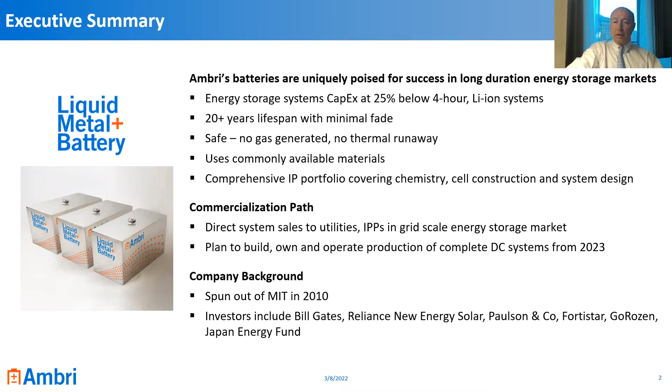And the materials are unique. It's a calcium antimony chemistry, so therefore we're not competing with EVs or other high volume applications for those materials. It's a US invented technology, mainly at MIT and at Ambri, which is based outside of Boston. And we do plan to manufacture these cells and containers in our initial US manufacturing facility.

Cells are packaged into trays. Trays are packaged into containers. The containers are about 1 megawatt hour each, 250 kilowatts of power capability. It's a high temperature chemistry, which means it does not require air conditioning systems. It's very suitable for hot temperature locations or very cold temperature locations.

Ambri is sharing this technology in order to get on the radar with DOE. We have developed this technology in the United States. We're planning to manufacture it here in the US. We're opening our first manufacturing facility later this year in Massachusetts.

And then in the end of 2022, we'll be securing a site for a high volume manufacturing facility somewhere else in the United States. We'd like to work with DOE on setting up those manufacturing facilities, understanding that there are non-lithium technologies coming that will be suitable for helping the proliferation of renewable energy onto the US grid.

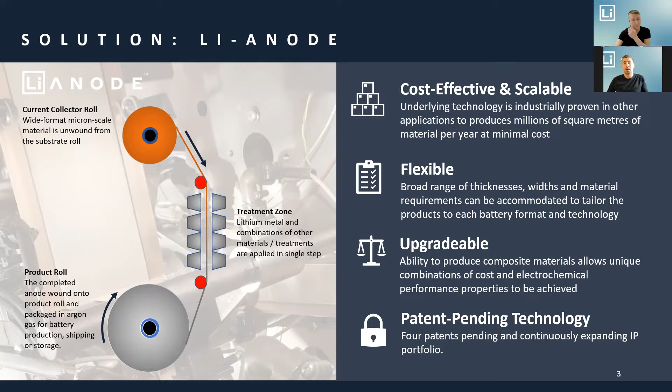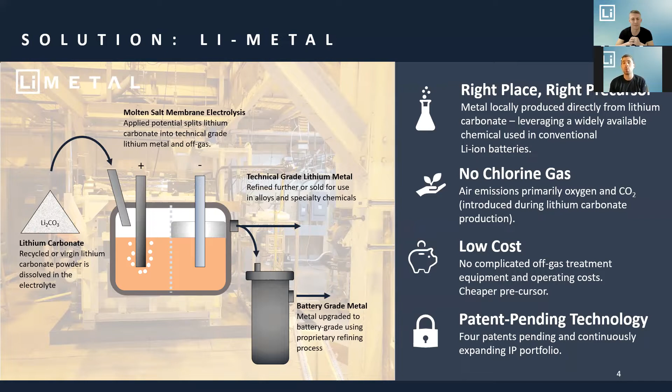Moving on to the lithium metal anode, we believe that there's a significant amount of workforce development in areas like roll-to-roll processing. For example, in Rochester, New York, where Kodak has largely shut down operations, there is a tremendous amount of films and roll-to-roll processing experience, and we hope to build on that with these two commercial demonstrations. We thank you for your time and look forward to the opportunity.

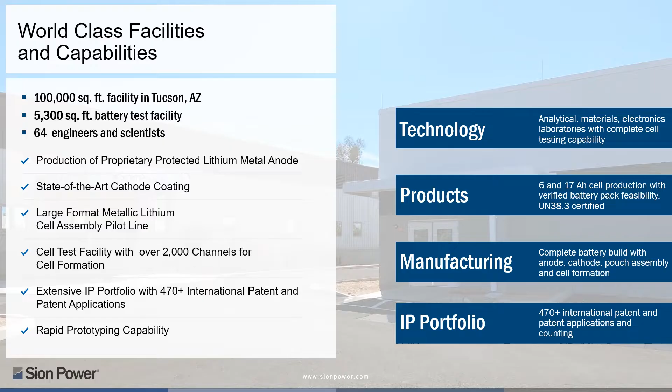Launching our next generation lithium battery technology, we are engaging in development activities with commercial partners and are finalizing our manufacturing expansion plans for the future. We've distilled our expansion initiatives into three phases.

Phase 1: in an effort to meet current demand, we will launch our new pilot facility that will be co-located on our campus, delivering large format commercial cells of 50 to 75 amp hours.

Phase 2: we will expand our manufacturing footprint, entering the Gigafactory class to meet forecasted demand. And as we anticipate continued growth in the EV space and continued market pull for advanced battery technologies, we expect to continue manufacturing expansion efforts to align and meet future demands as our Phase 3 activity.

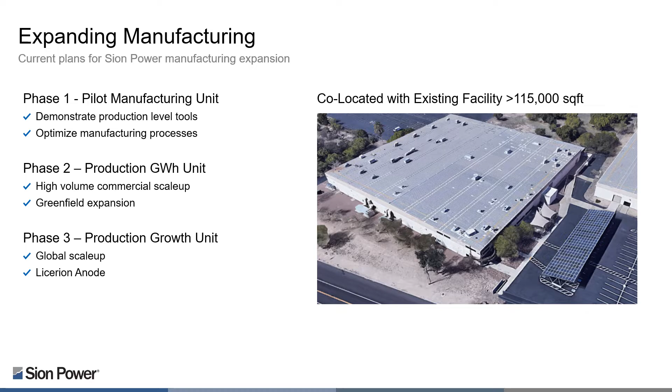Some of the challenges U.S. battery manufacturers face are common to other industries today, with the first challenge being critical supply chain constraints. This would include availability and sourcing of raw materials, as well as critical component and material availability with equipment vendors.

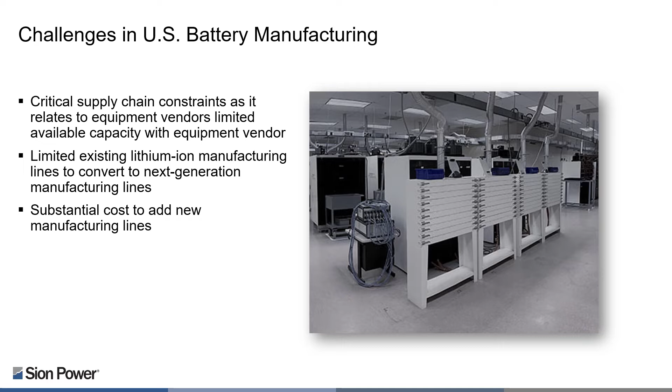Second, the availability of existing or idle lithium-ion manufacturing facilities that could be retrofit and upgraded with next-generation technology is limited. And third, the capital requirements needed to build and commission battery manufacturing facilities is substantial. Having access to capital and continuity of supply will be vital.

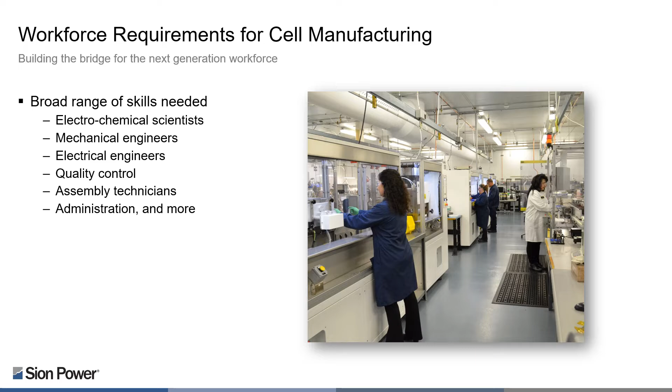Building the bridge for the next generation workforce is essential. As we've entered this new era of electrification and advanced manufacturing, we must focus on the training, development, and recruitment for a variety of disciplines and skill sets. It is imperative that we consider the entire ecosystem, securing public-private partnerships, working hand in hand with educational institutions to build training programs to develop the next workforce.

The electrification movement is no longer a question of if or when. The electrification movement is now. Thank you for your time and learning more about Sion Power.

II-VI Incorporated, a Pennsylvania-headquartered leader in engineered materials for more than 50 years, is bringing to market breakthrough technologies to enable the sustainable and cost-effective electrification of the U.S. economy. These include advanced battery materials, proprietary lithium-sulfur batteries, and high-efficiency hydrometallurgical recycling of battery waste.

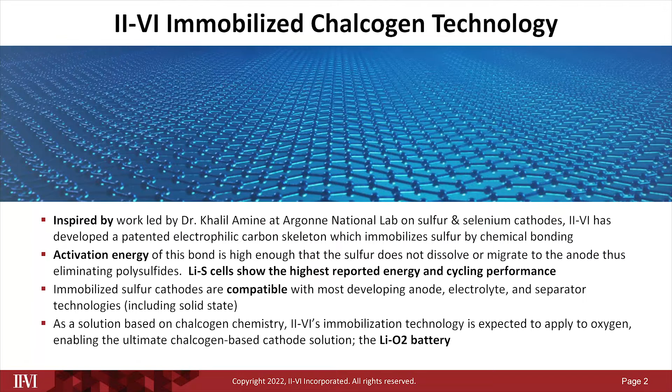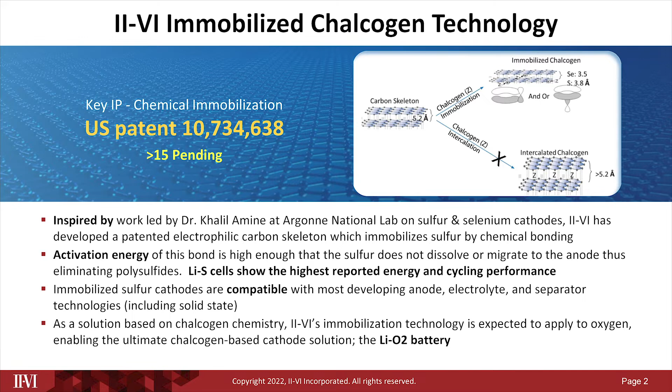Inspired by work led by Khalil Amine at Argonne National Lab, the engineered material behind II-VI's breakthrough lithium-sulfur batteries is a patented electrophilic carbon skeleton, which chemically binds to sulfur to prevent shuttling loss of the active material. Solving this shuttling issue enables the highest reported energy and cycling performance for lithium-sulfur battery cells.

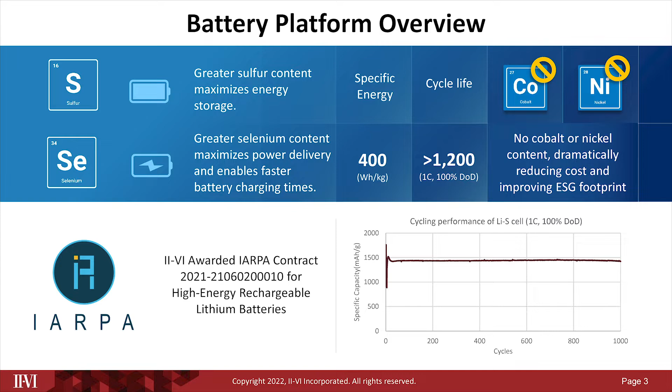Based on abundant sulfur, these cells contain no cobalt or nickel and can be further optimized for high power performance by adding highly conductive selenium to the carbon-sulfur cathode.

To ensure a competitive and stable supply chain for this breakthrough chemistry, II-VI has invested in pilot-scale manufacturing of lithium-sulfur battery materials, electrolytes, and electrodes, and will make these available to cell manufacturers at commercial scale.

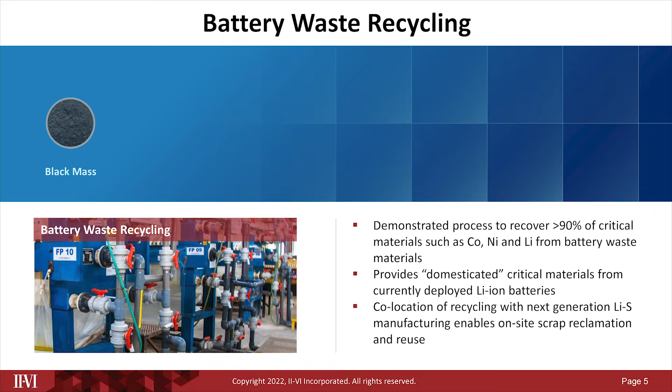Completing the whole life cycle approach, II-VI is also at the forefront of hydrometallurgical recycling of battery materials, with processes proven to extract more than 90% of the critical metals value in battery waste streams. This can be applied both to recovery of value from manufacturing scrap and end-of-life batteries.

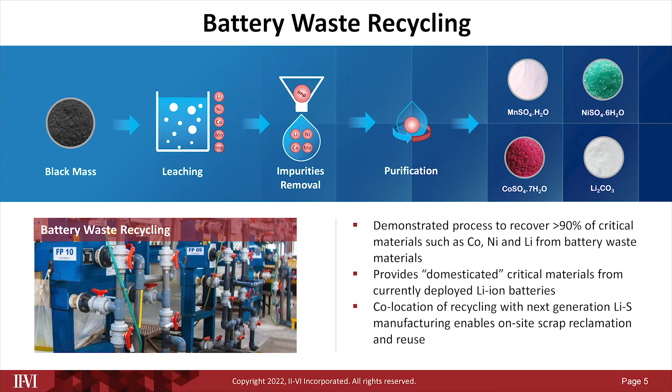With these initiatives, II-VI is positioned to accelerate electrification of the U.S. economy, enabling next-generation battery chemistries, efficient recycling, and a stable battery material supply chain.

Lithium-sulfur cells are expected to enter pilot production in 2024, with battery components and materials available beginning 2023, while pilot-scale recycling will begin in 2025.

Challenges to making these activities competitive globally are the need for skilled electrochemical and hydrometallurgical manufacturing personnel, simplified transportation logistics for batteries and battery materials, and support from local, state, and federal governments for the large capital investments required to operate at efficient scale.

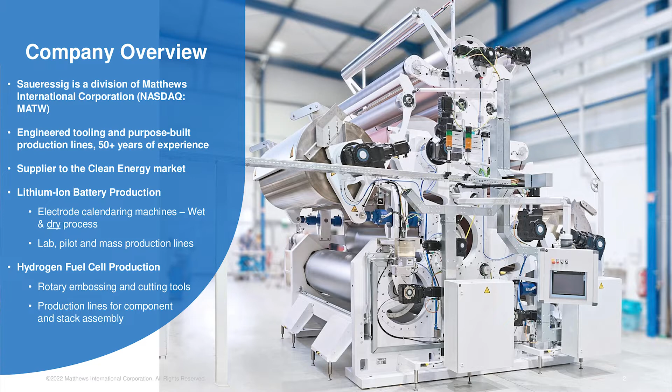For batteries, we design, engineer, and build electrode calendaring lines, both for traditional wet process and for dry process. This includes lab, pilot, and mass production lines. For hydrogen fuel cell production, we design and fabricate rotary embossing and cutting tools, and have the capability to engineer and build production lines for fuel cell component manufacturing and stack assembly.

We have designed and built machines specifically for the production of electrodes using a dry process with no organic solvents. These machines have demonstrated the ability to produce quality electrodes using a dry process. It works by using calendaring systems to produce a web from dry electrode powder, which is then laminated onto a metallic foil. Please note that Saueressig does not manufacture batteries or electrodes. What we do is engineer and build the production lines to enable battery manufacturing.

We're supporting the domestic production of batteries in a number of ways. Our electrode calendaring and laminating machines are designed in Germany, but we assemble, install, and commission them domestically. We're building a roller refurbishing operation to recoat and refinish the rollers that are worn after use on the production line, which helps extend the life of the rollers.

We're also investing in a new application development center in the US for battery manufacturers to experiment with formulations and processes on lab and pilot machines, both for the wet and dry process for electrode manufacturing.

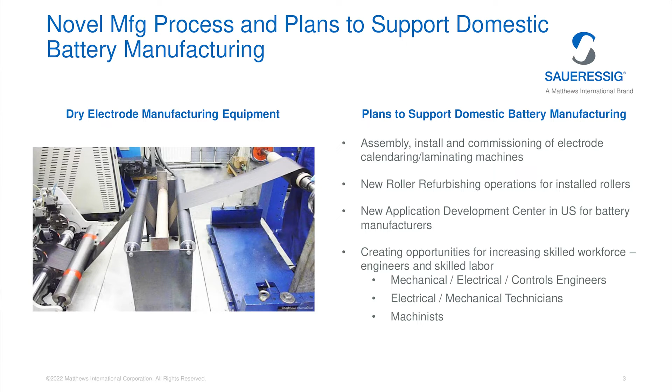To boost domestic capability, we have several workforce requirements, including engineers and skilled labor across multiple disciplines. This includes mechanical, electrical, and controls engineers, electrical and mechanical technicians, as well as skilled machinists.

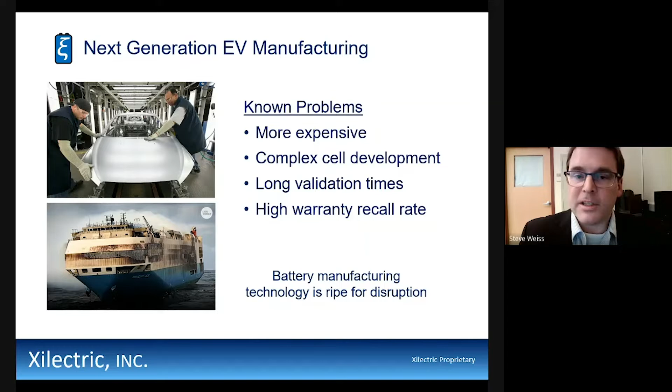Xilectric's core technology is a new electrochemical technique called cyclic coulometry. Cyclic coulometry was invented to measure the loss rate or self-discharge rate of a lithium-ion battery at an addressable condition, for example, at a particular temperature, voltage, or current. At the same time, without any added cost or complexity, the technique measures the associated growth in the complex impedance.

Xilectric is currently developing derivative QC metrics based on this and other key insights that can be measured in under 60 seconds. Based on these innovations, Xilectric is developing techniques for cell development, cell modeling, pack and cell validation, as well as manufacturing. Xilectric has been developing fast formation techniques based on our unique hardware for the last year and a half.

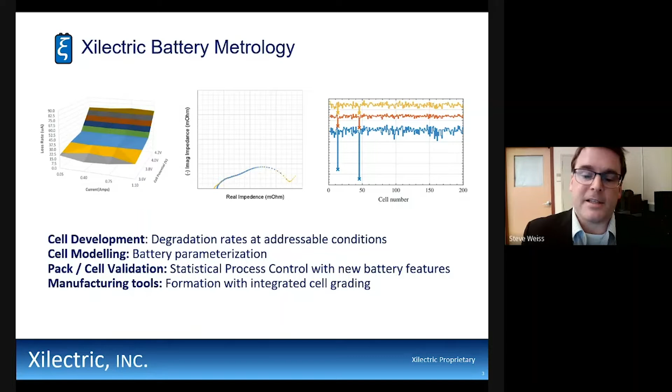The goal is to show that cell grading can occur at the same time during formation while providing superior insights to the QC metrics used today, such as multi-week OCV holds.

Xilectric is interested in leading a response to Topic Area 12, new manufacturing processes, or partnering for Topic Area 12 or 6 with appropriate partners who are interested in the new formation techniques. The objectives include faster throughput, improved battery insights, and integrated active feedback systems for smart manufacturing initiatives. The program would develop the hardware, process, and algorithms.

Xilectric seeks manufacturing partners for lithium-ion or beyond lithium-ion categories. In particular, emerging chemistries may not require the same formation processes, but would still require innovative and advanced cell grading.

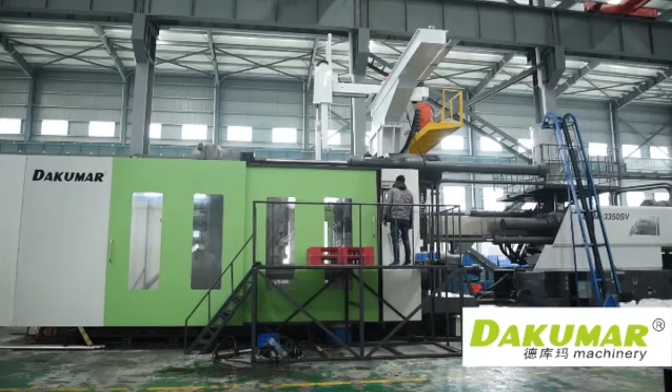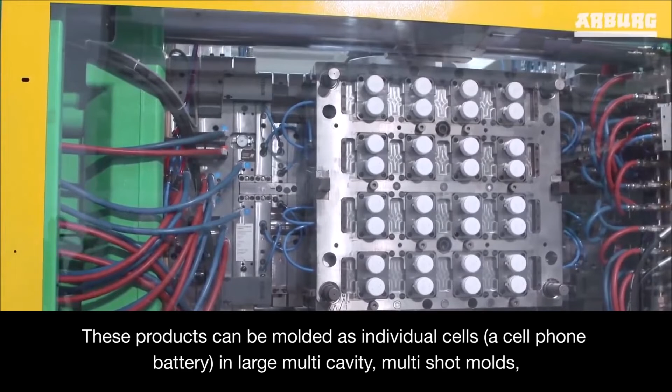This is an opportunity for which we have IP, issued and pending, trade secrets, and new injection moldable resin compounds. These products can be molded as individual cells, a cell phone battery, in large multi-cavity, multi-shot molds, or as battery or capacitor packs of say 1,000 cells all at once for EVs.

Additionally, the wiring bus can be molded in series or parallel as an integral part with the electrodes, thereby further reducing the labor content. The assembly labor costs are gone.

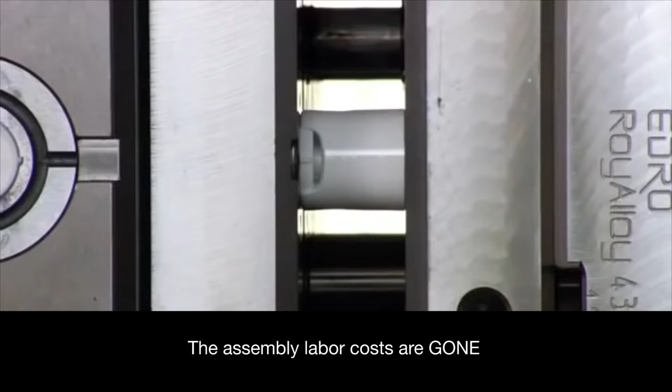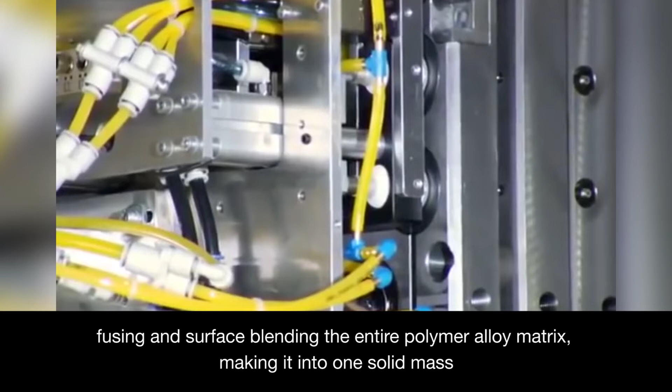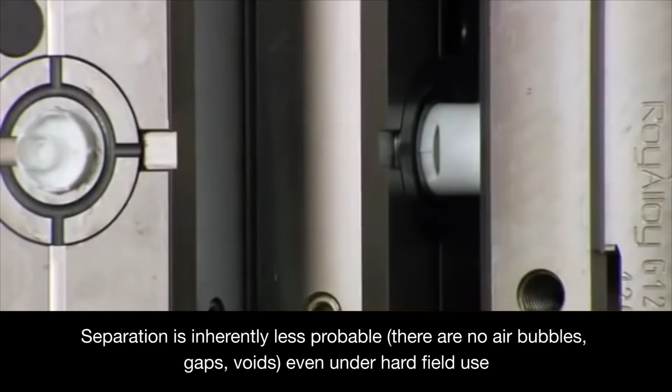Because they are polymer alloys, they are injected under several thousand psi pressure with heat, fusing and surface blending the entire polymer alloy matrix, making it into one solid mass. The anode, the cathode, the electrolyte, the case are all in one solid molded piece. Separation is inherently less probable. There are no air bubbles, gaps, voids, even under hard field use.

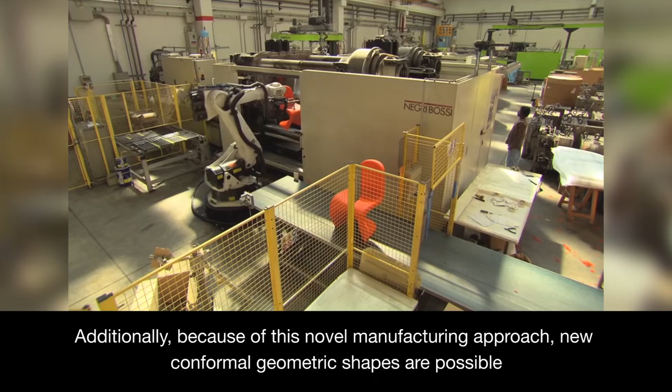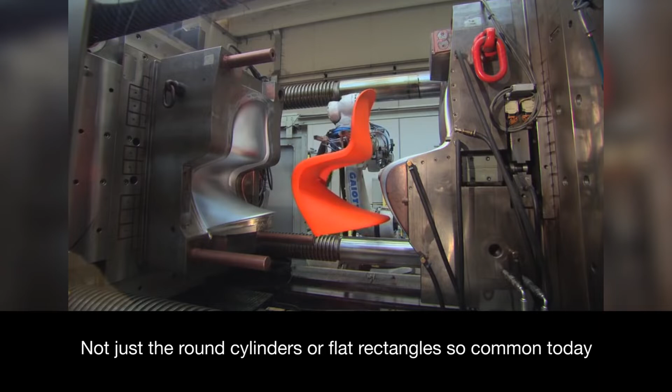Additionally, because of this novel manufacturing approach, new conformal geometric shapes are possible. Like all plastic parts, they can look like just about anything you can imagine, not just the round cylinders or flat rectangles so common today. It is adaptable to many different chemistries, anything that can take the heat beyond lithium.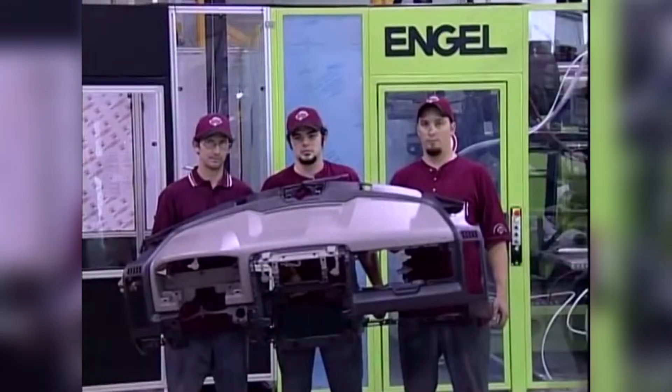This is a game changer in terms of cost reductions, taking capital and labor out. Physically more robust electrical storage units, probably higher capacities, new product designs, new applications, and geometric options.

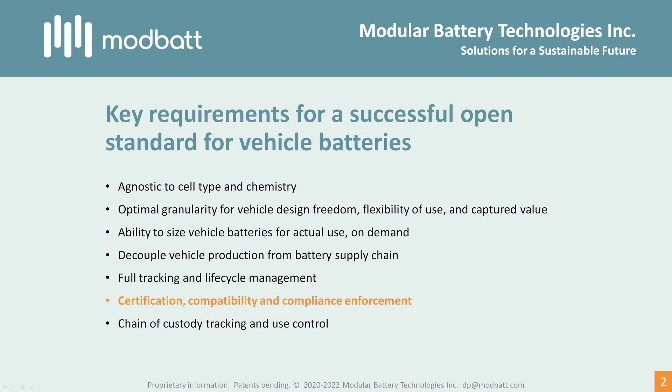Full tracking of the battery life cycle, as well as certification for compatibility and compliance to the standard, as is ensuring chain of custody tracking and use control.

Based on decades of experience, including designing and building high-performance vehicles from the ground up, ModBatt has developed a comprehensive suite of technologies. We are proposing them as the foundation for an open, royalty-free industry standard. We call this standard the Extendable Battery Framework, or EBF.

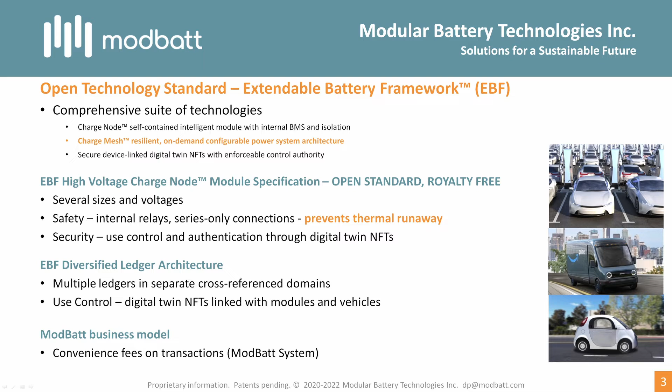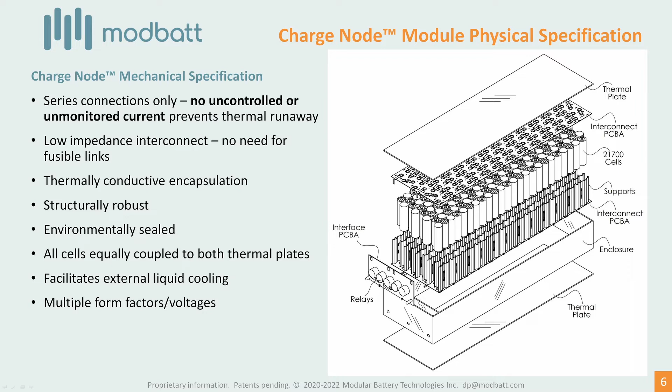It includes Charge Node, a self-contained intelligent module with internal BMS and isolation, Charge Mesh, a resilient, on-demand configurable power system architecture, as well as secure device-linked digital twin NFTs. Though based on proprietary IP, the Extendable Battery Framework is royalty-free to manufacturers of certified batteries and vehicles and administered by the Safe Battery Alliance, a 501c6 nonprofit.

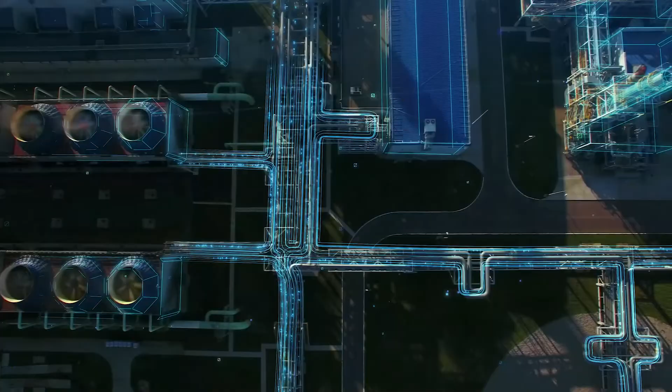To build the battery-powered economy of tomorrow, U.S. manufacturers today must navigate a complex supply chain, meet safety standards and regulations, and get to market quickly. UL is the global safety science company. We are a leader in testing, inspection, and certification for large batteries and energy storage systems.

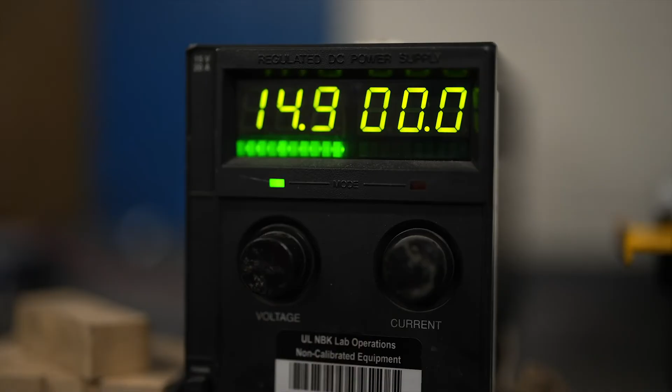We have extensive experience serving the entire battery industry value chain through our vast regulatory knowledge and regional laboratories. Since its founding in Chicago, UL has remained steadfast in pursuing safety on the cutting edge of American innovation.

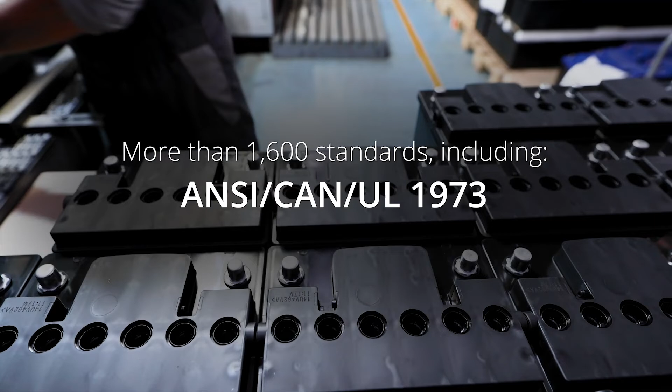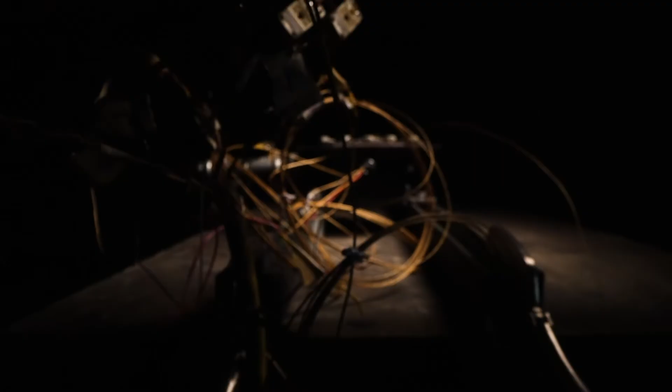Our expertise has helped develop more than 1,600 standards, including the world's first stationary battery, the first energy storage system, and before the market demanded it, the standard for repurposed batteries, anticipating what eventually became a vital piece of the modern supply chain. We also helped develop the recently published UL 9540A test method. We have more than 500 renewable energy experts with deep knowledge of requirements in more than 150 countries.

Of the Fortune 500 and Global 500, more than 60% are our customers. And the U.S. National Renewable Energy Laboratory chose us to be the permanent host for SolarApp.

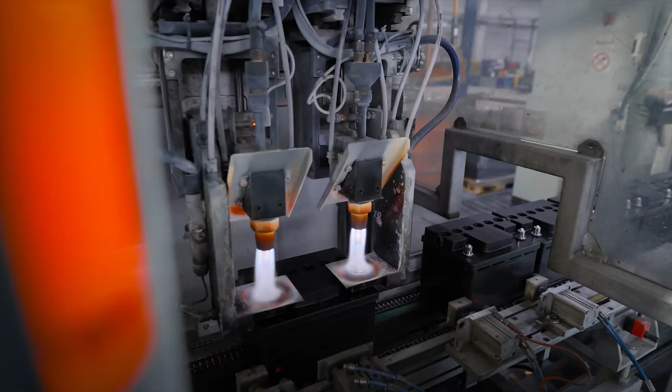Testing is critical to the entire battery supply chain, from manufacturers who rely on our insights into standards and our third-party impartial testing and certification, especially during component, process, cell, and pack manufacturing, to government agencies who rely on our expertise to help develop standards, to consumers who rely on the trust and confidence that comes from third-party testing, inspection, and certification.

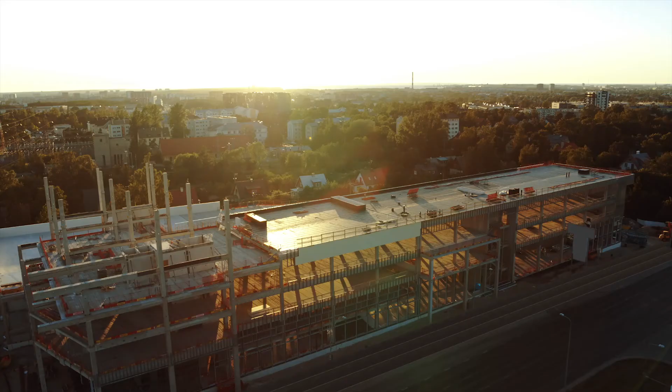UL is already planning to build the largest commercial battery laboratory in North America. Our funding will build a laboratory capable of battery testing for passenger and light to medium-duty trucks, industrial trucks like forklifts, and stationary batteries for applications such as energy storage, data centers, and telecommunications.

However, this laboratory is not designed for the much bigger batteries that power heavy-duty trucks, construction and agricultural equipment, ships such as tugs and ferries, and defense vehicles. With matching grant funds, we can scale up our operation to accommodate these very large battery applications, provide the critical testing that is missing in the marketplace, and add long-term performance testing.

U.S. battery independence is critical to maintaining the cutting edge of American innovation, construction, agriculture, shipping, and defense. With support from UL, these critical American industries and more can power the country with greater speed, greater safety, and greater efficiency through the 21st century.

Where the U.S. has always led is in innovation and entrepreneurship, in breakthrough, frankly, in high technology manufacturing. What we do is try to translate our knowledge to the customer, and that comes in the form of projects, education, and outreach—running short courses and educational series to make sure students are getting appropriate training in the energy storage industry.

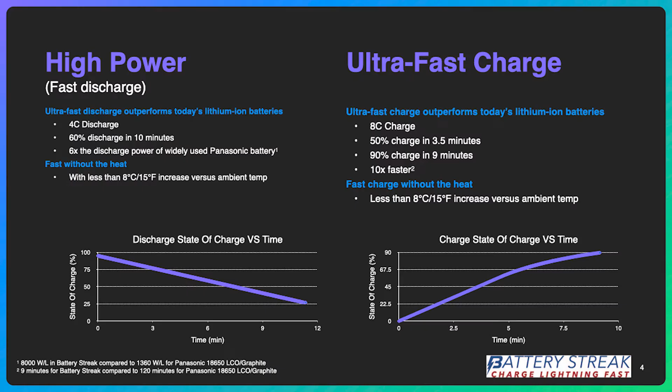Battery Streak is an advanced battery materials startup offering ultra-fast charging at room temperature and longer cycle life. With our technology, a cell phone and an electric vehicle could charge to 80% in 10 minutes.

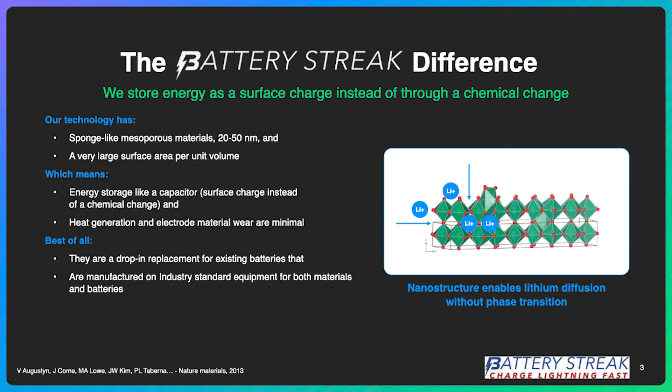You can think of electrodes made with our technology as sponges with very small pores, many times smaller than a human hair. These sponges have a very large surface area per unit of volume. We store energy as a surface charge rather than a chemical phase change. Using these sponge-like mesoporous materials, we charge like a capacitor and discharge like a battery, with minimal heat generation in both processes.

Our materials are different, but the battery architecture is the same as any traditional lithium-ion battery, so our batteries can be made on industry-standard battery lines and equipment. Battery Streak is currently moving into a larger facility and increasing our material production by a factor of 20, moving from the prototype to the early manufacturing stage.

Battery Streak will be providing a demonstration at the Advanced Naval Technology Exercise Coastal Trident 22, and are currently working with the Army and partners on an aqueous electrolyte. We've also received an NSF SBIR STTR grant to develop a cobalt-free cathode. Additionally, other downstream commercial end users have expressed substantial interest.

There is a weak link in the U.S. supply chain for bringing new battery technology to market, and that is cell manufacturing. We can get 10, 20, or even 50 cells made by a contractor, but if we need to produce hundreds or thousands of cells per month, there are simply no domestic options.

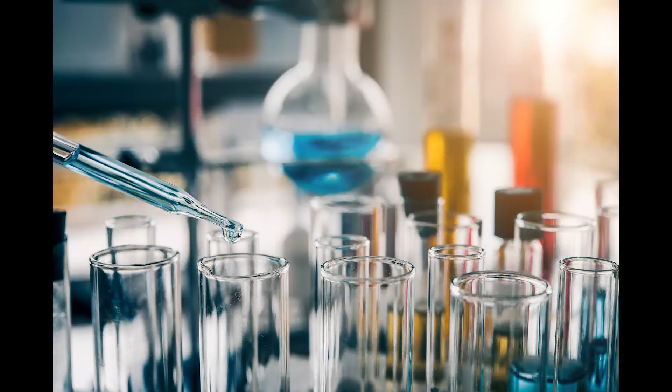Supporting our growth will allow us to hire more chemical engineers, process engineers, and battery cell manufacturing employees, creating high-level American jobs in the energy sector. It will also allow us to create or develop a partnership with a domestic cell manufacturing facility.

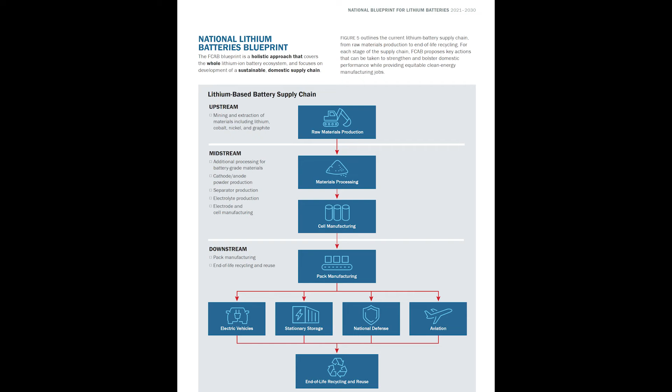Battery Streak respectfully asks that you provide grant support to our advanced battery material development and to increase cell manufacturing domestically, allowing the U.S. battery market to outcompete our international competitors.

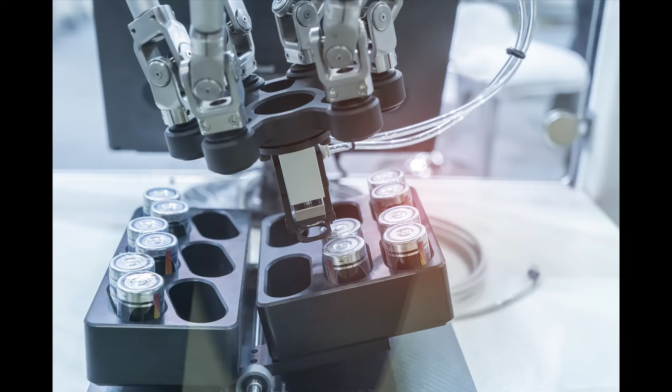In addition to direct grants, we suggest considering development zones, tax incentives, and assistance streamlining both state and federal permitting and environmental requirements. Please help us be a part of the LiBridge to continue our advanced materials research and development, create new STEM jobs, and develop domestic manufacturing capacity to serve the DoD and commercial downstream markets. Thank you.

Hello everyone, my name is Jim Myung Lim from Hunt Energy Enterprises. I'll talk about our plan for demonstration of continuous supercritical hydrothermal ALD-coated single crystal NMC and LFP cathode material manufacturing in the United States. Hunt Energy is one of the largest private energy companies.

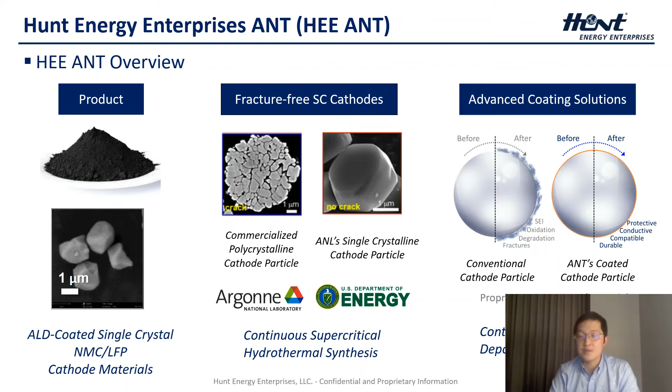We have a long history of operation and development in oil, gas, LNG, refining, power, utility, and energy storage. Our venture is Hunt Energy Enterprises ANT, and we have been developing ALD-coated single crystal NMC and LFP cathode materials. We have two technological pillars: one is continuous supercritical hydrothermal cathode synthesis, and also the coating solutions by using atomic layer deposition.

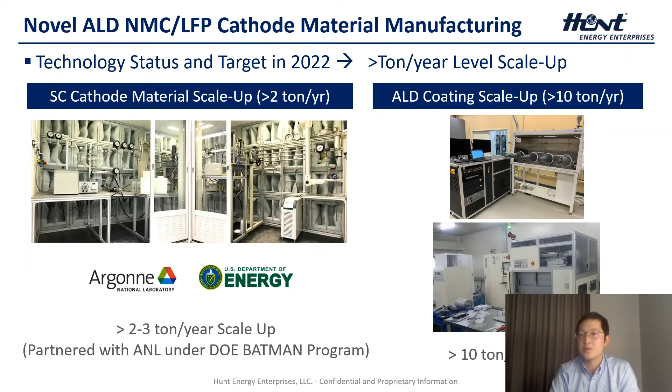Our technological status and target in 2022 is scale up. Regarding the cathode material synthesis, our target is more than 2 to 3 tons per year scale up. That is our plan with Argonne National Lab under the United States Department of Energy Battery Manufacturing Program. And then our coating scale up target is more than 10 tons per year level.

This is our plan for demonstration, a 4-year demonstration and development plan. The first year and a half from 2023, our plan is to do pilot scale prove-out more than 100 tons per year scale, and also we are going to combine our cathode synthesis and ALD coating into one system. And for the other 2.5 years, we are going to perform the demonstration plant development in the United States, more than 1,000 tons per year scale.

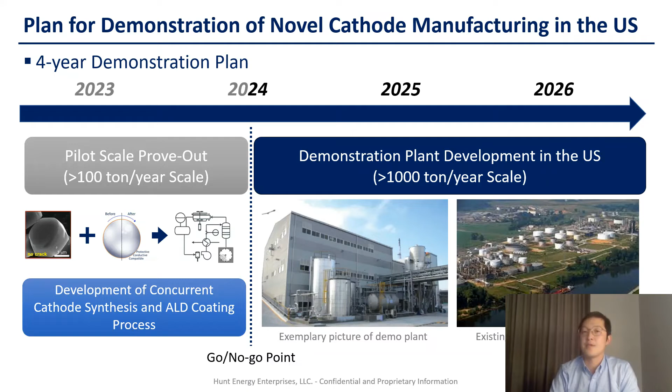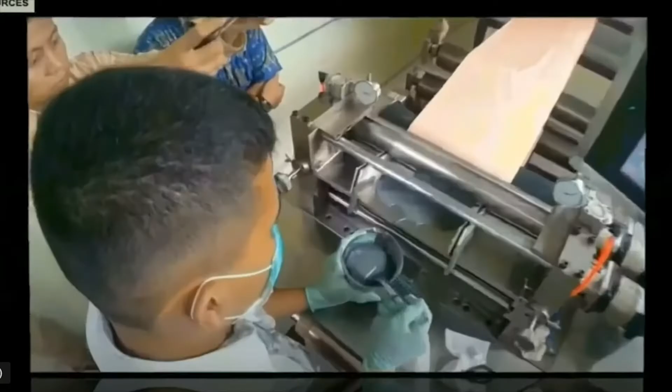Dynami Battery Corp enables faster charging and higher power lithium batteries using novel manufacturing technology. Current battery manufacturing technology is robust but lacks precision and flexibility. We create microstructure electrodes using digitally controlled tools. Our proprietary technology leverages self-assembly and self-segregation to place binding materials out of the way of the lithium-ion paths.

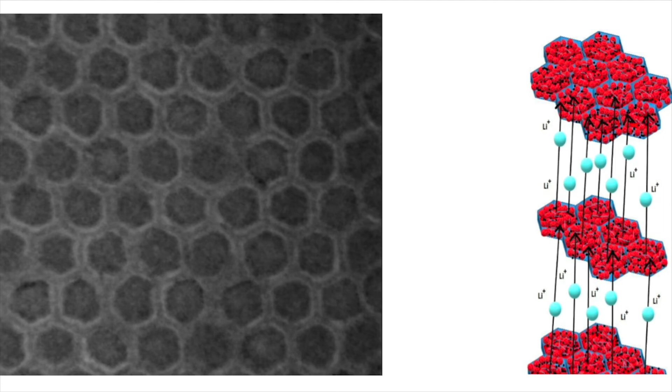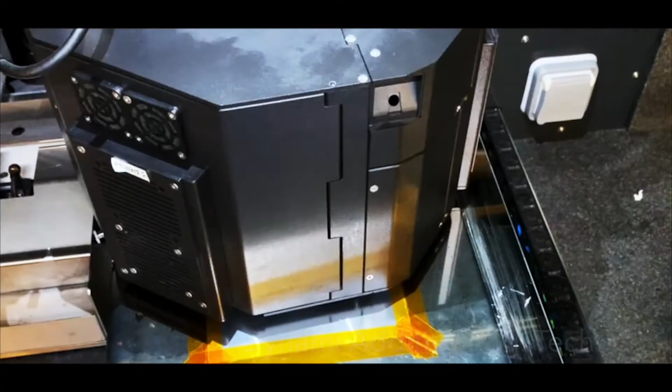These microstructure electrodes contain scientifically proven secondary pore networks that enhance the lithium-ion mass transport, creating an electrode that is up to 80% faster charging and higher power. The TRL5 honeycomb-shaped microstructure electrode is compatible with most current and future battery chemistries and architectures, including solid-state cells. Our digital technology allows for faster laboratory-to-factory transition and creates a drop-in solution to current production lines.

To fulfill the promise of the electric vehicle industry and enable high-performance aerospace application, innovation in chemistry is not enough. Dynami is developing microstructure electrodes manufacturing technology for better battery cells today.

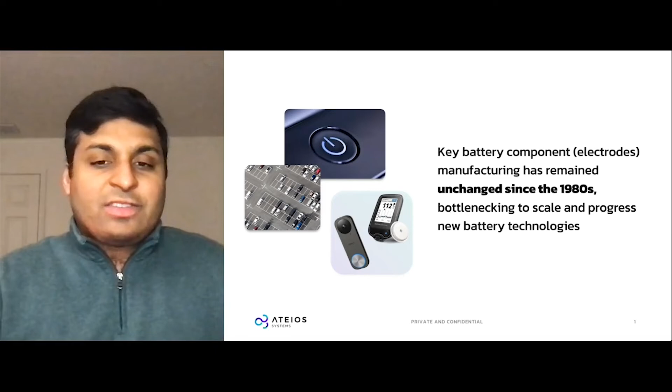At Ateios Systems, we're developing radiation-curable composites to enable rapid, inexpensive, and cleaner electrode manufacturing, thus addressing battery manufacturing here in the US. We've identified that the manufacturing process of the key components, specifically electrode, has remained unchanged since the 1980s. This is bottlenecking efforts to scale and lower costs.

We find that the current process is extremely slow, expensive, and toxic, where we take toxic solvents and mix them with battery powders to make an ink that is coated onto metal foils to form an electrode. This solvent is removed with expensive, long thermal ovens, becomes extremely toxic, and requires an expensive process and energy to remove.

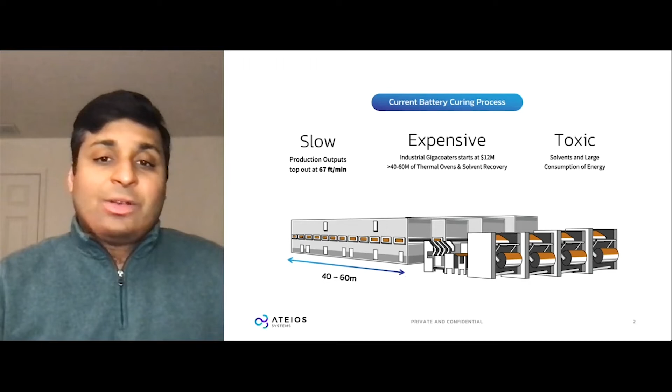And so that's why here at Ateios, we've developed a new solution that uses light. We have proven the elimination of these solvents, and this process will enable electrode manufacturing to be 10 times faster, 5 times cheaper, and 12 times cleaner, without compromising performance.

And what's really exciting about this technology is that it is chemistry agnostic, enabling its use on any type and size of battery, from developing better batteries for wearables and IoT in a $300 million market, scaling to drones and power tools, and eventually impacting the $50 billion market for grid and mobility.

And while our company needs significant support in developing this technology, we know that the US has to make significant infrastructure and workforce advancements to allow the whole industry to move forward. We see that the US faces many challenges across the whole value chain, from material and electrode manufacturing to battery assembly, because only 1% of lithium-ion batteries are manufactured domestically here in the US.

We can look to the past for a solution, where in the 1980s, the US faced the same challenges in the semiconductor industry that we face today. It made significant investments in something called Sematech, dedicating investment to building infrastructure, education for workforce, and advanced materials to keep America ahead of the competition.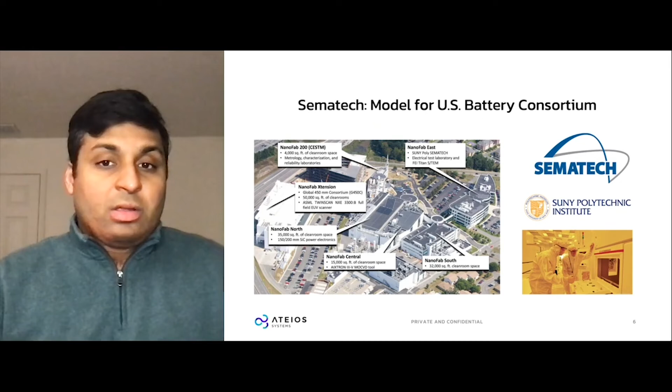We believe in this model because we've already proven it here at the Battery Innovation Center. This is one of 3 facilities in the US, significantly smaller than Sematech, but it has allowed our company and a lot of others to move faster, understand their costs, and build robust teams. We believe this is the model, along with our technology, to really enable battery manufacturing here in the US.

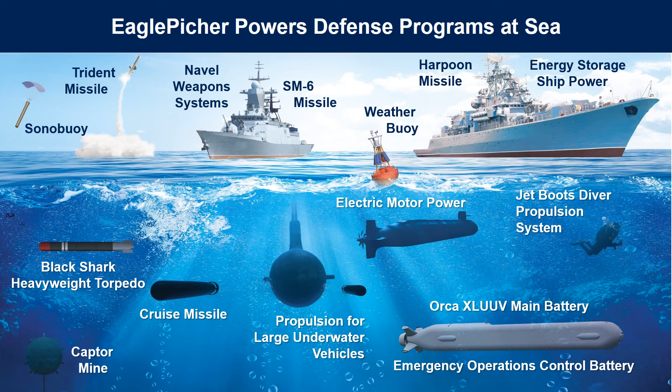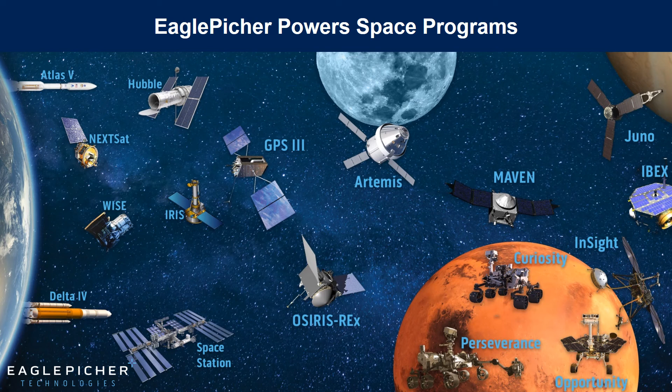EaglePicher's space heritage dates to the earliest days of the U.S. space program, when we powered the first U.S. satellite. EaglePicher has supplied batteries for more space missions than any other company. Our space batteries have powered launch vehicles, satellites, space research missions, and manned and unmanned missions.

EaglePicher developed and manufactured the first lithium-ion battery ever used in military aviation for the B-2 bomber. Whether it is 2 batteries for a Mars rover or 2 million cells for aviation, EaglePicher will always rise to meet the individual demands of our customers.

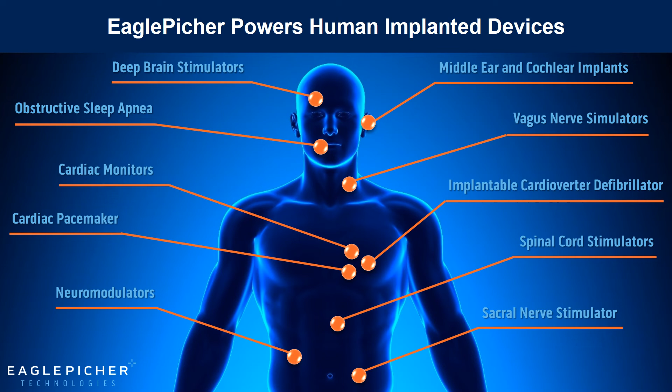EaglePicher has a long history of battery development for the medical industry. We developed and manufactured the first human implantable lithium-ion battery and the world's smallest implanted battery.

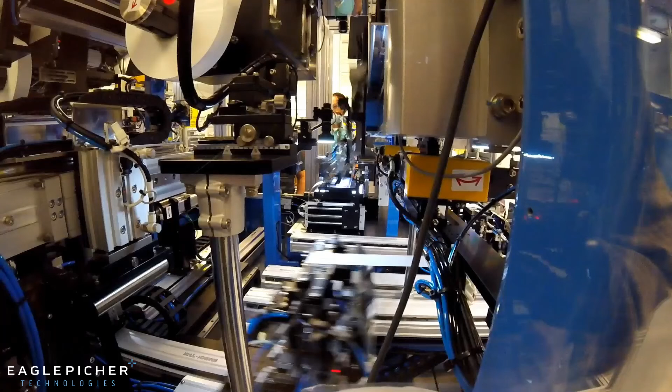The EaglePicher team is based solely in North America and focuses on the development and manufacturing of power solutions. EaglePicher's domestic manufacturing footprint provides us the ability to conduct rapid prototyping. We have advanced automation manufacturing facilities and scalable automated production lines.

Hi, my name is Eric Roundtree. I'm the head of operations and business development at EC Power. We are the inventors of the thermally modulated lithium-ion cell.

This technology was key for the all-climate battery, which was recently featured at scale, powering the public transit system for the 2022 Winter Olympics. It has also been utilized in the development of the Fastline Extreme Fast Charging Battery Series, and is now paving the way for true economy electric vehicle batteries that are safe, affordable, and critically practical, from top to bottom, for the end user, the manufacturer, and the battery designer.

Currently, our technology, which is 100% American-owned, is only produced at the prototyping scale within U.S. borders. In the past, we relied on foreign partnerships to achieve our automotive demonstrations and Olympics deployment. Now the opportunity is here to change this. We are well positioned to provide a distinct competitive advantage for the U.S. battery ecosystem. The DOE's planned $7 billion investment can significantly shorten the time required to bring this to fruition.

EC Power and our partners will build a production line that produces our proprietary cells and plug-and-play modules under the same roof. The facility will supply modules to targeted traction battery markets already undergoing electrification, and will be a demonstration line to help automotive partners build out new or retool existing battery lines for our technology.

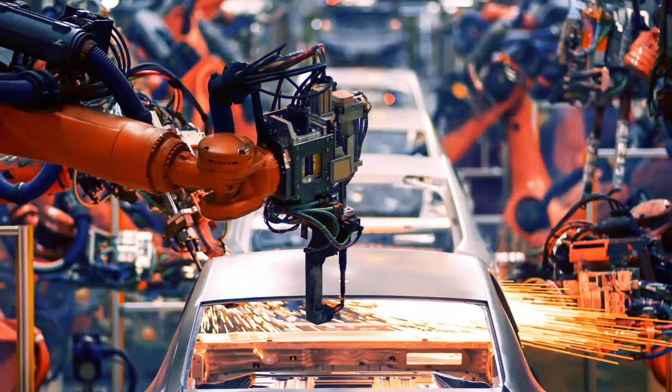In tackling this vision, we realized that we were part of a greater battery manufacturing infrastructure. To be cost competitive at the cell module level, we must be able to domestically acquire the raw materials at cost competitive prices. We must have recycling efforts built out near our plant facilities to drive down the cost and waste of scrap cells. Beyond materials, we must invest in our communities.

The skills needed to build out efficient manufacturing lines are already present. Education is required to sharpen those skills around the unique challenges of lithium-ion battery production. In the short term, the few advanced battery companies that exist in the U.S. will need to bear a significant amount of the burden for that training, and will need support in this effort as we scale.

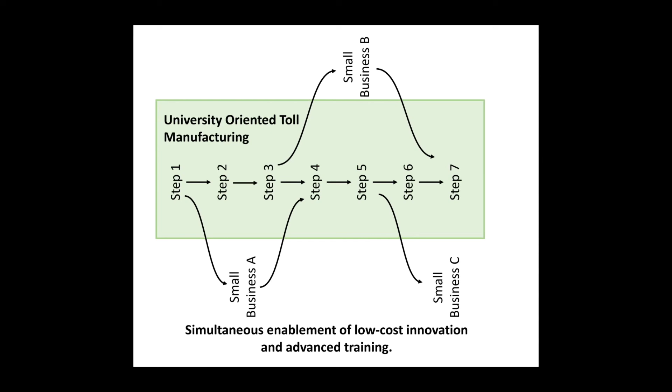In the long term, facilities akin to small, advanced toll manufacturing centers should be built out at numerous universities across the country that can provide training, students, and opportunities for low-cost innovation to the many new startups that we should expect to see in this space. For small businesses, the heart of our country's ingenuity, these manufacturing centers eliminate the capital needs associated with building out full pilot lines, instead allowing them to focus their full attention on their specific area of innovation within the supply chain.

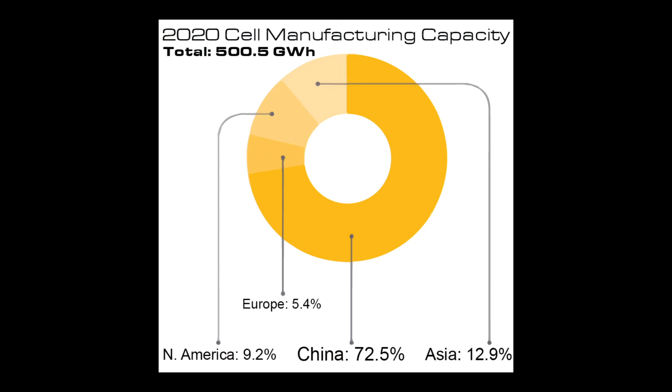With proper allocation of proposed investment by the DOE, the U.S. can do more than just participate in the global battery revolution. We can lead it. The technology needed, ours and others, is already here. It's imperative that it stays here and that it scales here. EC Power is looking forward to playing our role in that future.

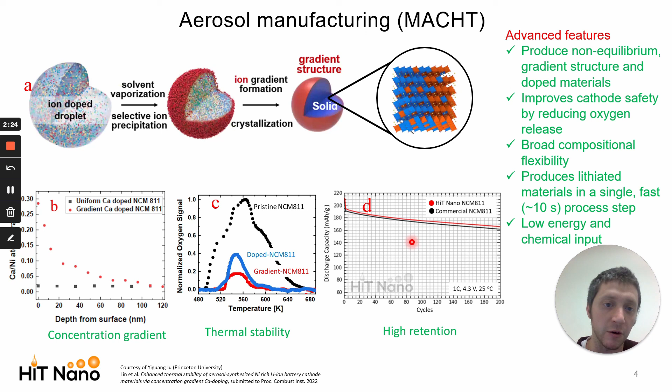Turning to the first of these technologies, the aerosol method is very flexible for designing novel materials with precise ion doping. As shown, we can achieve selective ion precipitation, which forms a concentration gradient structure. This improves the thermal stability and the electrochemical performance of the material. Moreover, this method has a very broad compositional flexibility, is fast, and it requires no additional chemicals.

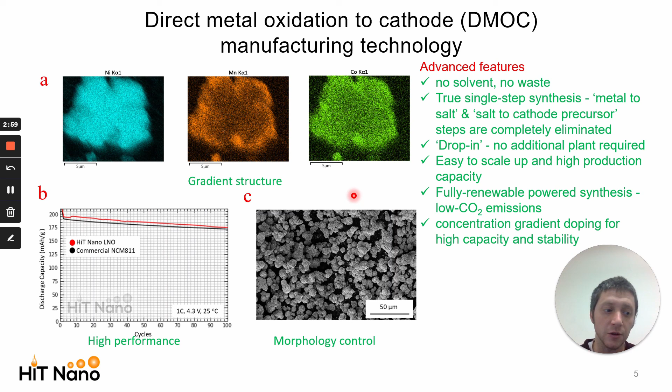In summary, these are two technologies which have the potential to transform conventional cathode manufacturing, and we are looking for partnerships to commercialize these technologies and establish environmentally friendly cathode manufacturing here in the United States. Thank you.